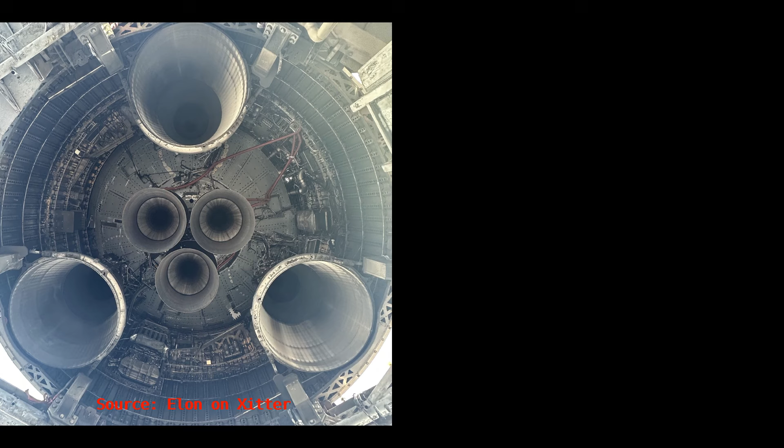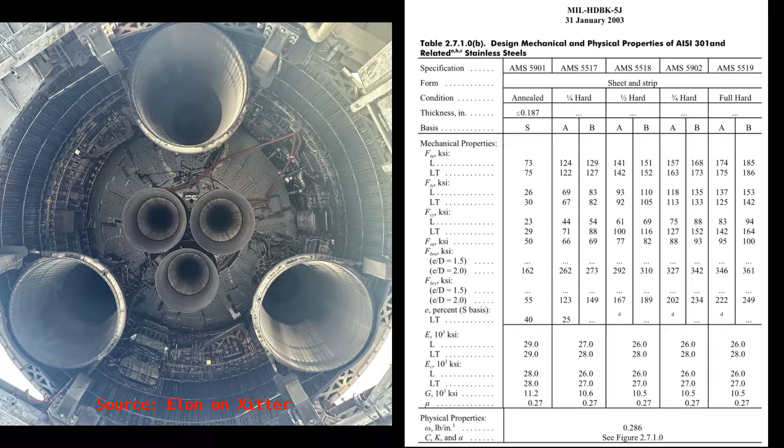Hi everyone, my name is Zach, and today we're going to talk about the biggest problem I think SpaceX is running into while defining the primary structure of Starship. In my opinion, the challenge Starship structural designers face is stability-related behavior stemming from its material selection, which will result in an extremely high dry mass and an extremely large structural coefficient.

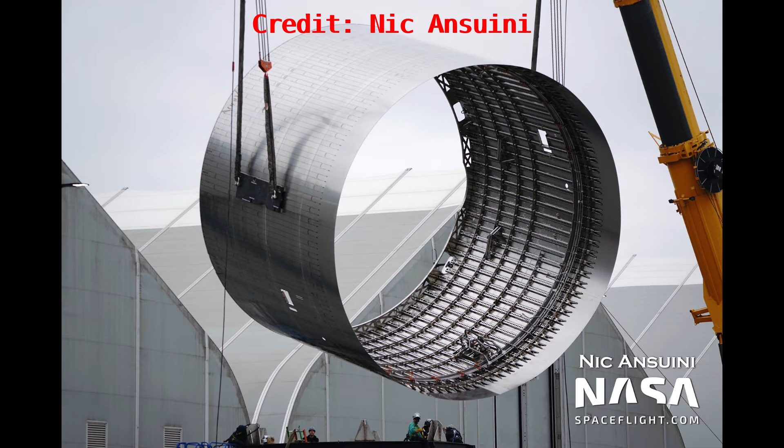I don't work there, and I don't mean to insult anybody's work here, so this is largely just an academic exercise. I haven't seen anybody talk about this in a way I think captures the nuance of the issue, so I figured it'd be a short and fun video.

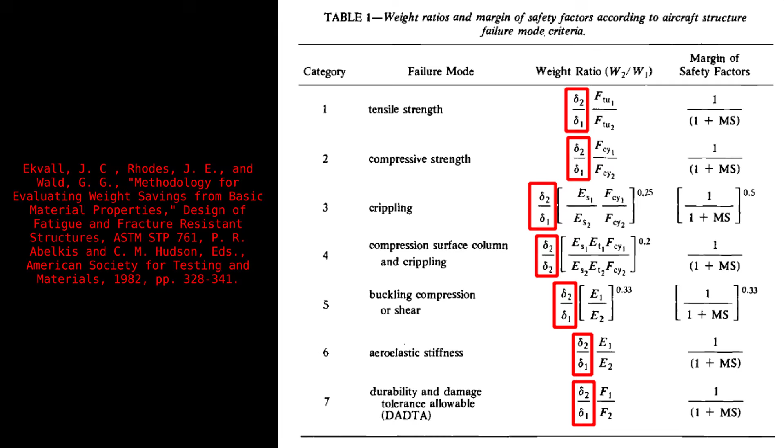In general, density is the most powerful term in the equation for weight savings. This may sound obvious, but it's not. A stronger or stiffer material has its stiffness or strength raised to an exponent less than 1 in the equations for stability, so the typical algebraic computation of weight savings which ignores buckling will lead you down a false path.

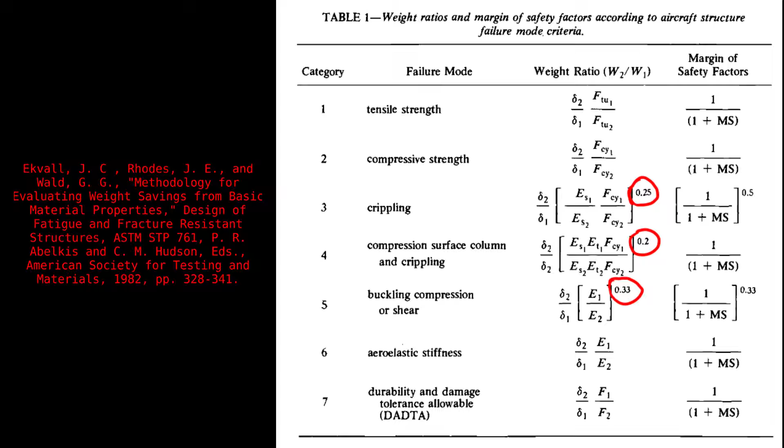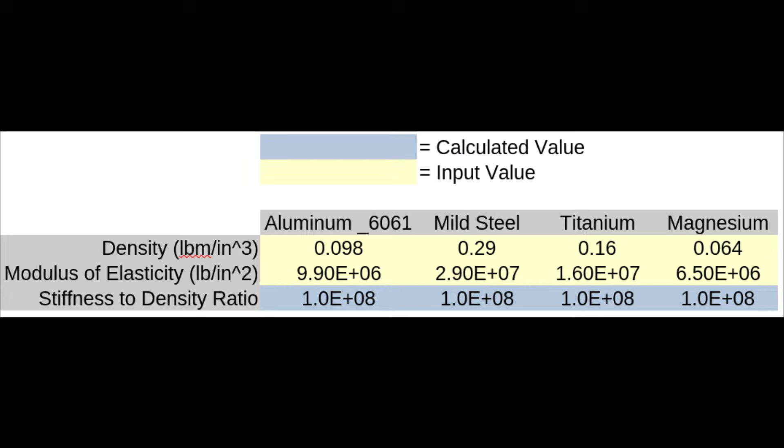If you compare the stiffness to density ratio for various aerospace metals, you'll see an almost serendipitous equality between them, and this could lead you to choose the material you think is cheapest or easier to work with. But as I showed before, it's not that simple. For example, the F-8 Crusader used magnesium extensively, even though magnesium is very annoying to work with. And it's not just because of the properties of magnesium, but because of what those properties let you do.

Any competent structural engineer knows that changing materials also changes the form that the structure wishes to take. A magnesium and aluminum skin assembly, both of equal weight and strength, could differ drastically in their ease of construction, because the aluminum skin might need stiffeners, while the magnesium skin might not.

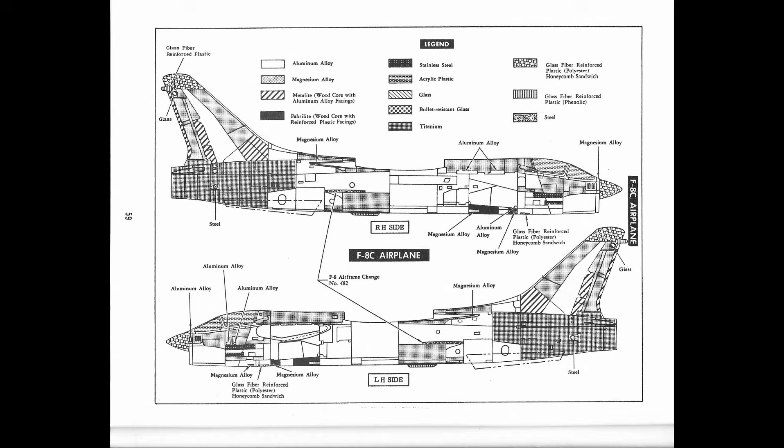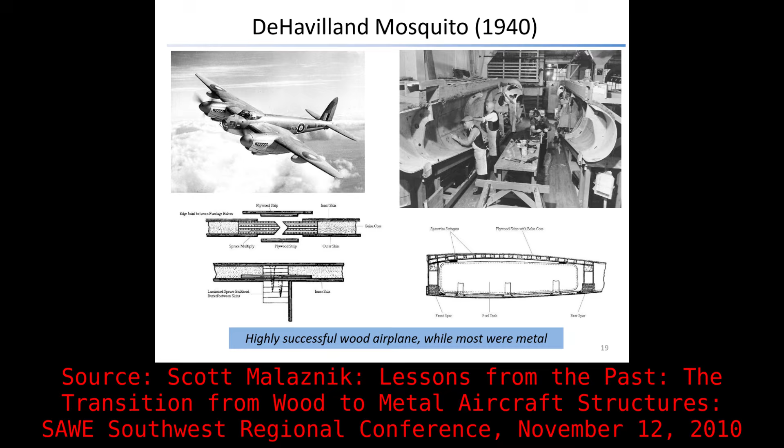A steel structure may wish to be a spiderweb of small members to prevent local buckling, whereas a wooden structure can be so globally thick without incurring a weight penalty that global buckling may be the only concern. In this way, you can envision a design using a high-density and high-stiffness material, like steel, to be a balancing act of many different stability-related failure modes.

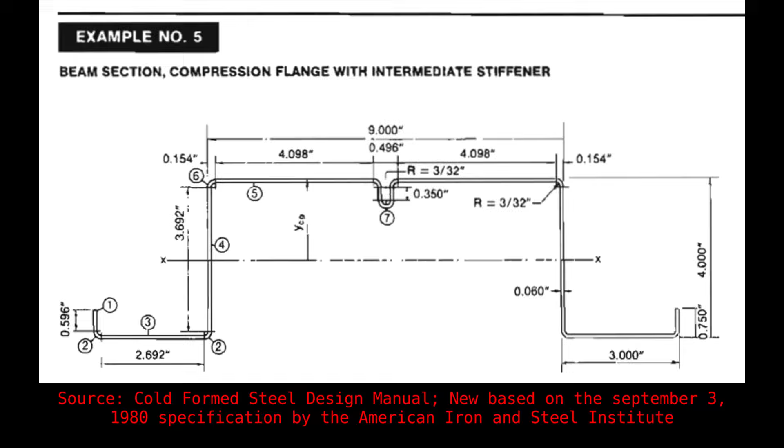For this specific example, because the width of the plate is the same, and the densities differ by a factor of 20 and the stiffness by a factor of 29, the two plates of the same weight would differ in strength by a factor of 309 in favor of the wood. The 1-inch thick plywood plate is just as heavy as a steel plate that's 48 thousandths of an inch thick, but carries 309 times more load before it buckles.

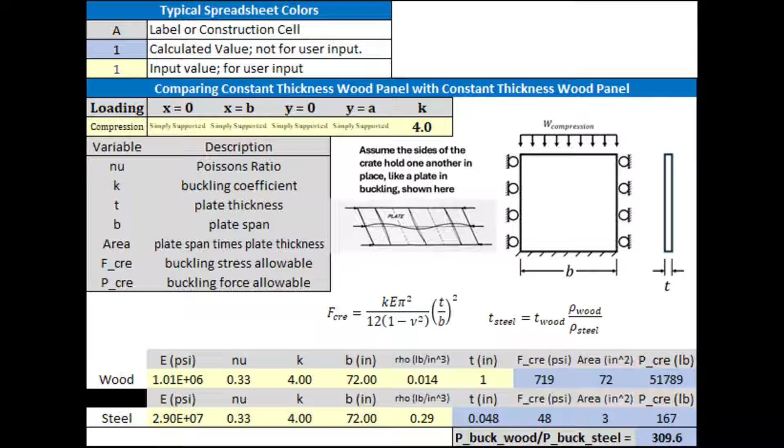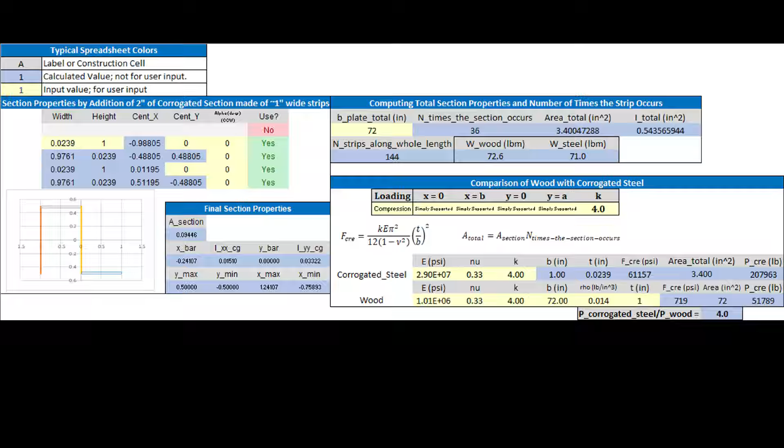The solution to this problem shouldn't surprise you. It's to interrupt the steel plate into many smaller strips, and when you do that, you see the steel example becomes far more efficient than it was before. If you break the plate into a corrugated section with a net height of 1 inch made up of 24-gauge steel, you'll have a section with 4 times the linear buckling resistance of the wooden design at approximately the same weight, 71 pounds instead of 72.6 pounds for the wooden design.

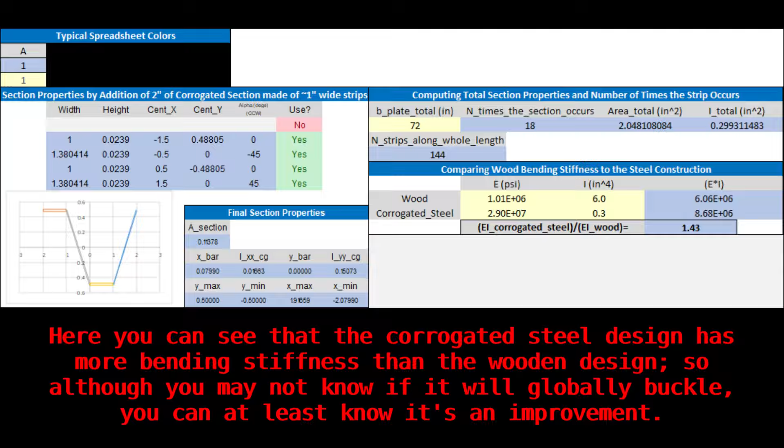But now you've won one design trait at the cost of another. You need to check that the global stiffness isn't worse than that of the wood by comparing the modulus of elasticity times the second moment of area to the wooden design to ensure you haven't compromised the global buckling at the cost of the local. But this is all just one example for a single structural feature. Imagine this level of tailoring for every web and flange on the entire vehicle, and you can imagine the degree of work needed to really tune a vehicle's structural behavior.

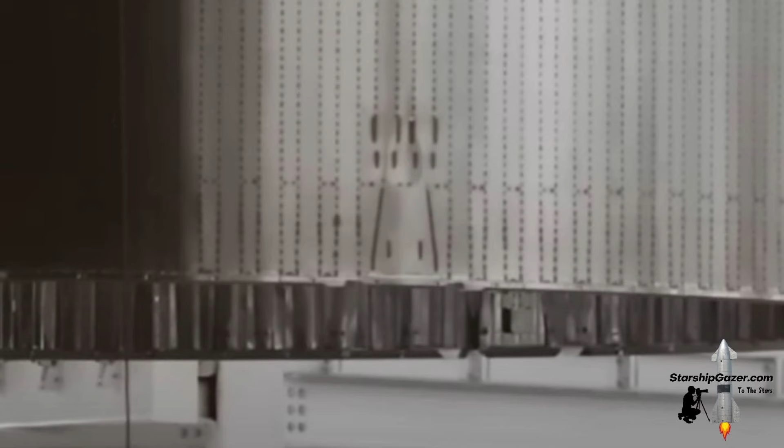Circling back to Starship, I think the architecture is doing a lot of work to mitigate the shortcomings of the material selection. By catching the booster from the top, it can avoid loading a hot and empty cylinder structure in compression, which means you get to write margins for a lot of the structure to the high tensile yield allowable, rather than the lower compressive yield allowable.

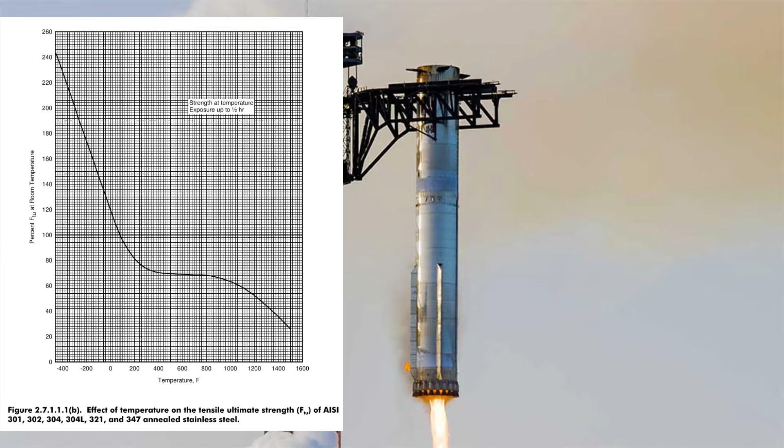Additionally, by pressurizing the vehicle's primary structure with a cryogen, they can place the entire primary structure in tension rather than compression on ascent, which can ward off buckling so long as you comply with a couple of load conditions, the most important of which, in my opinion, is that the combined hoop stress and compressive or in-plane stress doesn't get too close to the yield stress of the material.

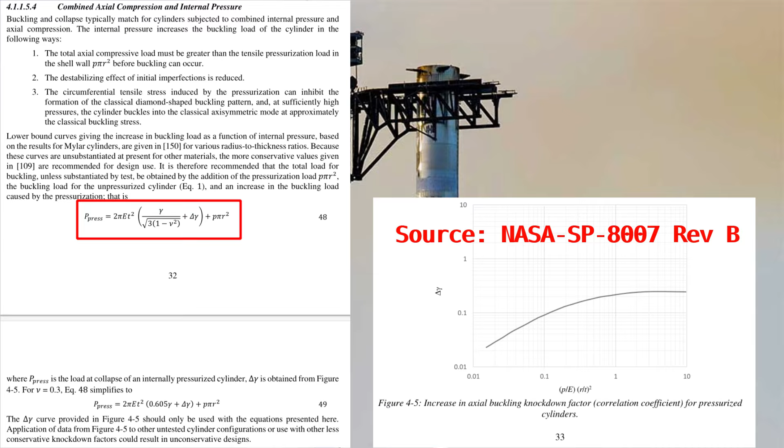And because this material gets far stronger in the cryogenic regime, this seems like a really good way to capitalize on the benefits of the material selection. Starship, on the other hand, will encounter all kinds of challenges due to its material selection, especially on descent. If the plan is to actually send this vehicle to Mars, where it will have to land on legs from its bottom, it will need to be placing its entire primary structure in compression, and under a transient load that I believe will be closer to a shock load than a load that could be represented quasi-statically.

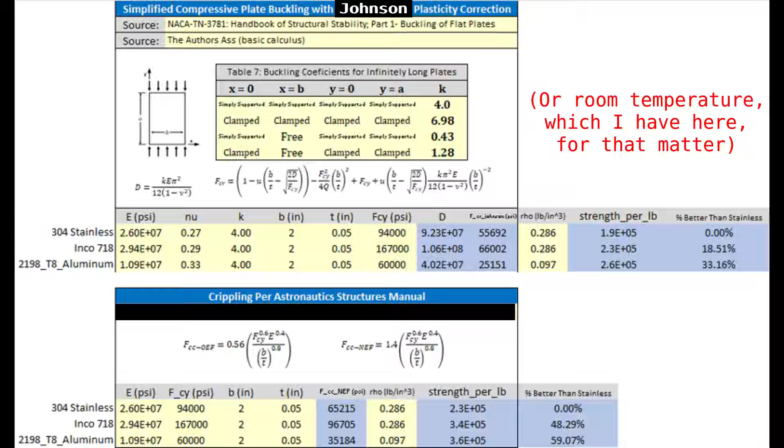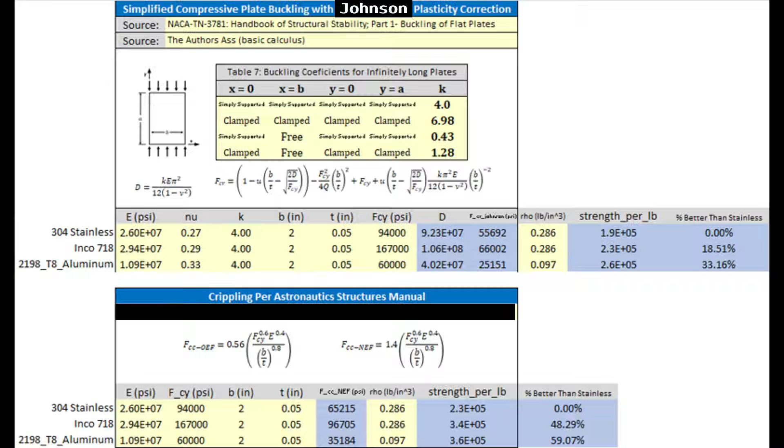I think holding some degree of internal pressurization can help with this. But if you look at the plastic buckling or crippling behavior of this 304 stainless at high temperatures, you're in for a wild time. Being courteous and assuming you're allowed to damage the structure irreparably on landing, which is what crippling means, can help the story drastically. I think they will try and make it so the first Starships to land on Mars won't be expected to fly again. That way they'll be able to use their own crippling structure as an impact attenuator until they manage to build a catching tower or whatever their plan is.

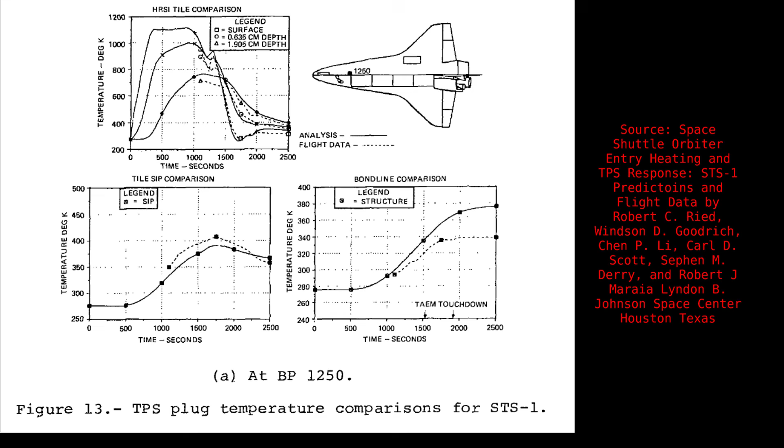From a thermal structures point of view, I have to imagine they want to use the higher temperature capacity of stainless steel and allow more heat to transmit to the primary structure than, for example, Space Shuttle may have done. But doing that reveals another particularly nasty problem, and that's the very low thermal conductivity of 304.

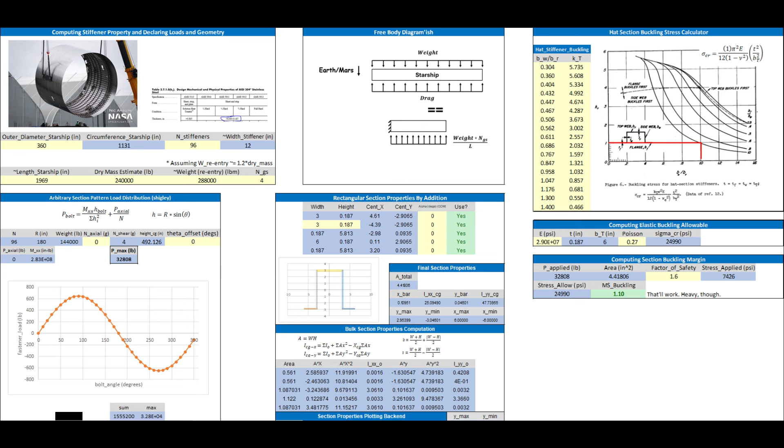Starship appears to be using hat sections longitudinally in order to allow hoop expansion of the tank and as the primary load carrier. If they're cranked up to the maximum thickness of the sheet and strip stock of the AMS specs sourced by MMPDS, they're stuck at 187 thousandths of an inch thick. So if both the skins and the sections are that, the only way to get more cross-section in there is to pack more detailed stiffeners in there. And if they're forming these at full hardness, then the bend radius allowables will restrict the geometry of the stiffeners. And I think that's what's going on here. It's probably why they're knocking holes in the webs on the innermost side. In essence, I think they're stuck with a fixed height of stiffener.

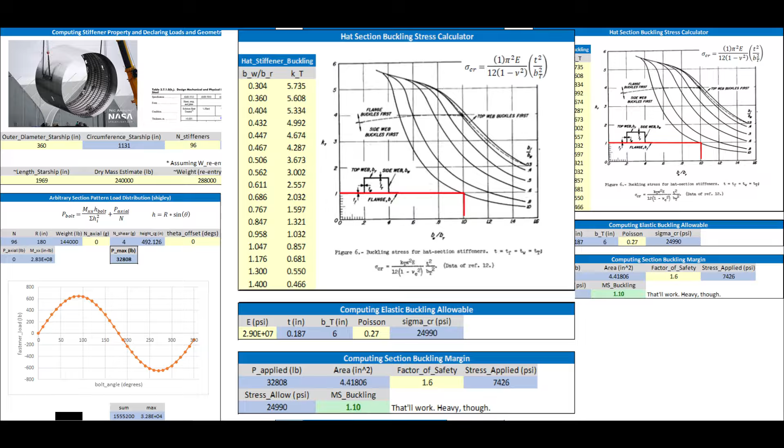And if you're allowing the OML to get hot, this is not quite the geometry that you want. If the outer flanges and skin try to expand and the inner flange stays cold, then you're going to get all kinds of interesting thermal buckling going on, and extremely high compressive forces on the inside flange, while it's being loaded in bending or compression, of course, which is not only stiffer because it's colder and therefore taking more load, but is also the compressed side of a beam undergoing thermal bending, which needs to be resisted by the internal pressure, which actually gets worse the higher the moment of inertia of the stiffener is.

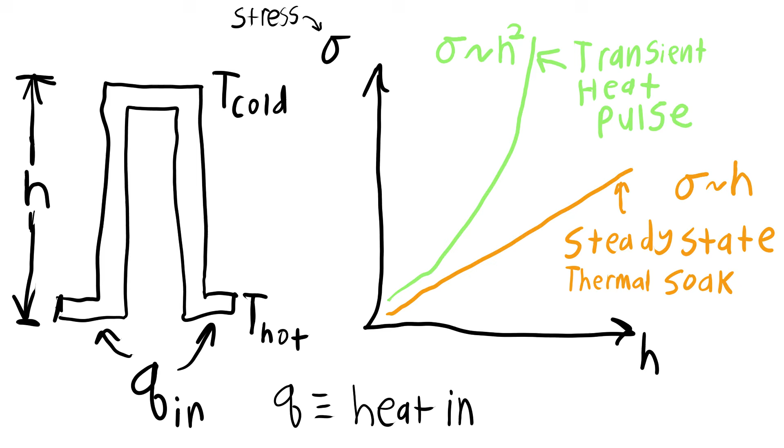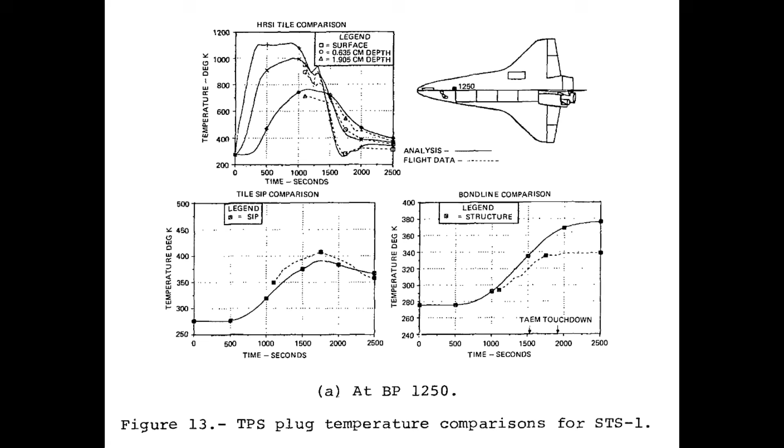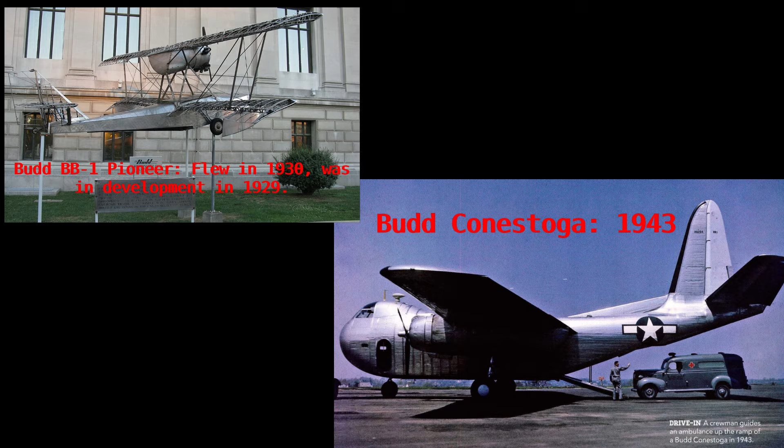So, unless I'm not understanding the situation here, which is a very strong possibility, I think the TPS to primary structure demarcation line is going to be limited to temperatures comparable to that seen on the Space Shuttle, which, in my opinion, squanders a really good use for the stainless steel. It's a really unique case of stainless steel in aerostructures, Starship is. Stainless steels have been in use on flying boats and aircraft since at least the 1920s, and on rockets since Atlas V gave up on steel balloon structures and transitioned to aluminum isogrid.

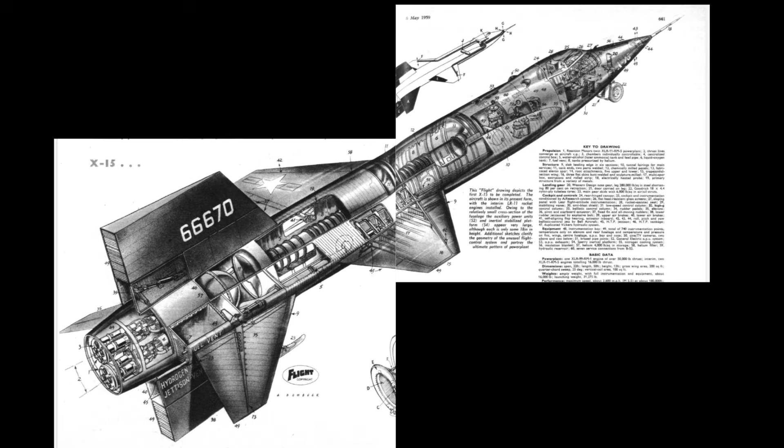I wouldn't be surprised if such a change happened in the future to either aluminum or a superalloy like Inconel, because if they don't do that, and if they want to get weight out, they're going to need to make this thing look a lot more different than it does now, or they'll just make the engines work better. That seems to have worked for them so far.